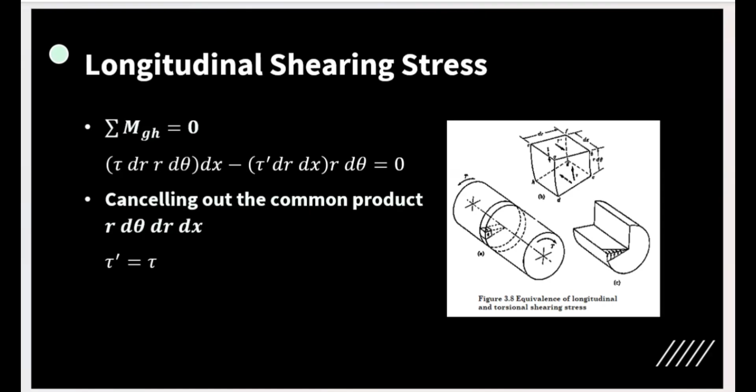The resultant longitudinal stress equals Q sub 1 delta L. Considering longitudinal equilibrium, Q sub 1 is equal to Q sub 2 since they share the same shear flow.

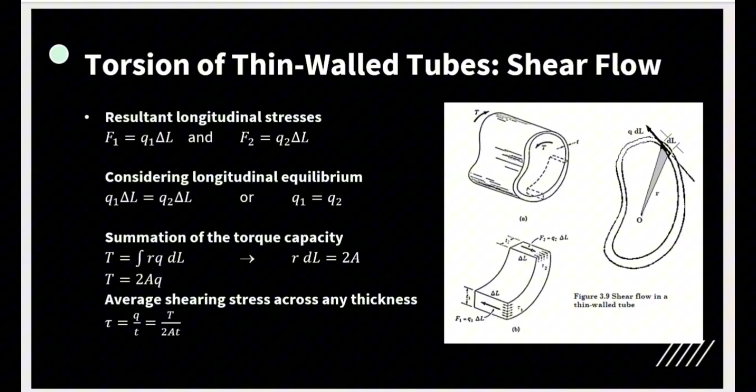Just like I said, it's similar to what we discussed before. But for us to really understand or grasp the concept, let's answer this example: a torque of 600 Newton meter is applied to the rectangular section shown in the figure.

So we have a rectangular section shown, where 80 and 30 mm are measured center to center. That's the consideration - measuring center to center. Meaning, the analysis is that I measured it at the middle to get the average, since there's still thickness, right? So it states here that we need to determine the wall thickness so as not to exceed the shear stress.

Of 80 megapascal. So remember our discussion on limiting stresses - it's the same concept again, similar to what we discussed before. We have a limiting shear stress of 80 megapascals, so it should not exceed that. And second, what is the shear stress on the short sides? Also, neglect stress concentration at the corners.

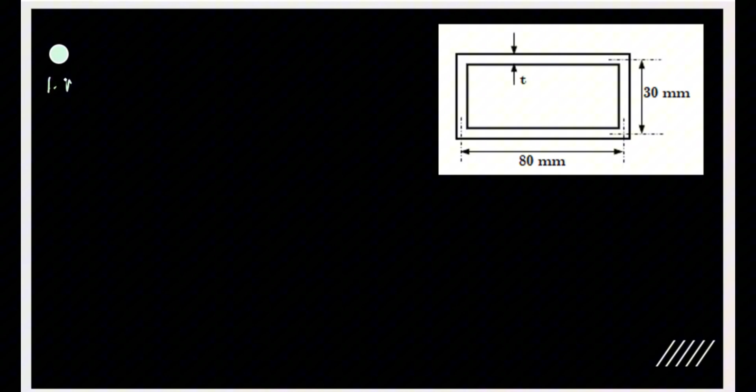Okay, so that's our illustration. For us to answer that, let's place it here on the upper right corner. So first, let's look at the illustration and answer the first question, since the first question asks us to compute for the wall thickness. Let's compute for the wall thickness.

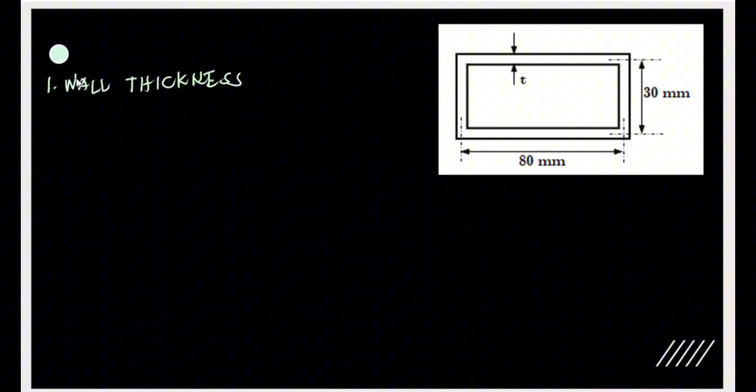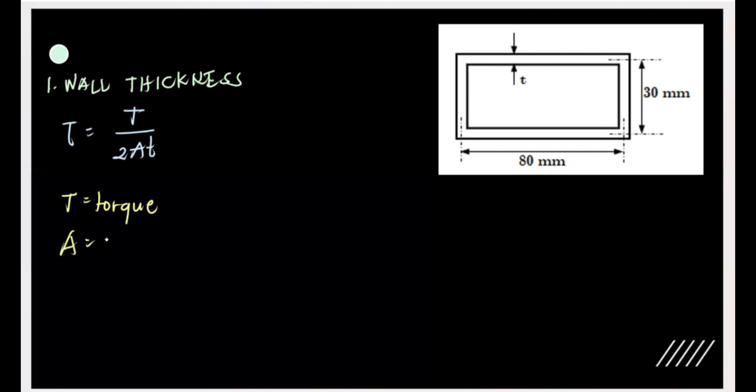For the wall thickness, we're going to use the formula, as I said earlier: tau is equal to T over 2A times T. Now what are the elements there? T is the torque value. A is the area of the section. And T is the wall thickness. So these are what we're going to use.

From our problem, our torque value is 600 Newton meter. Let's jot it down: 600 Newton meter. Our area of the section is 30 by 80, in millimeter squared.

And then wall thickness - this is our unknown. So it's up to us what unit we're going to use. Let's find it in millimeters, since our dimensions are already in millimeters. So if that's the case, we have to convert this torque value into Newton millimeter, that is 600 times 10 cube Newton millimeter.

Question: what is the shear stress? It's stated in the problem - we have a limiting shear stress of 80 megapascal.

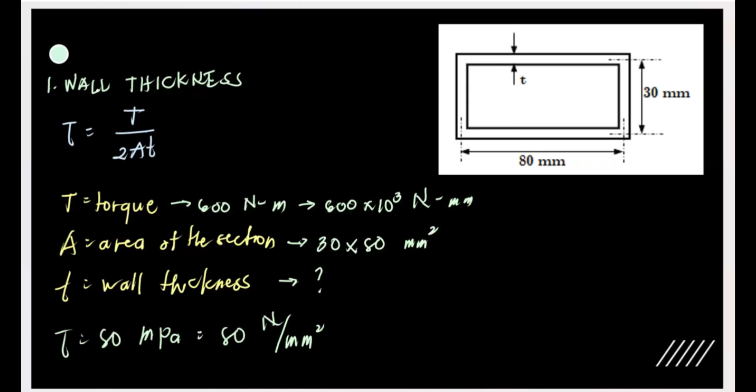Shear stress is 80 megapascal, or 80 Newton per square millimeter. Substituting from our equation: 600 times 10 cube over 2 times 30 by 80 by thickness is equal to 80. Simplifying, we get thickness equal to 1.5625 millimeters, or 1.56, to be exact. That's our thickness, the value we solved. It's quite thin, maybe because the stress is limited only to that value. Of course, the higher the shear stress, the higher the section or area covered by our stresses.

That's where our shear flows. So, 1.5625, that's our answer. Now, next question: what is the shear stress in the short sides?

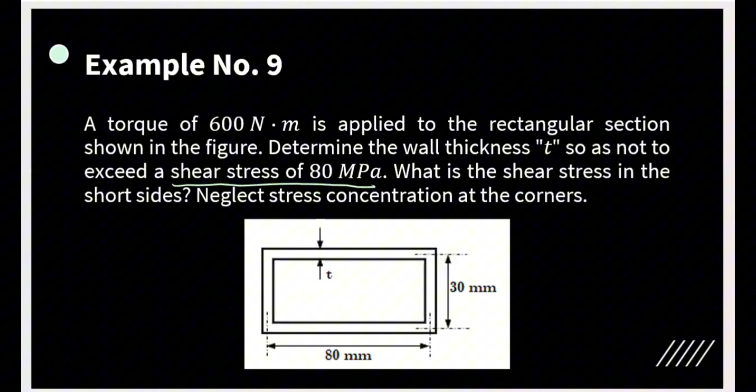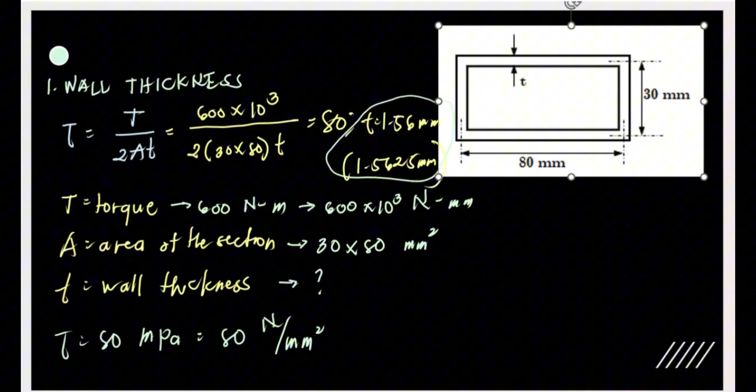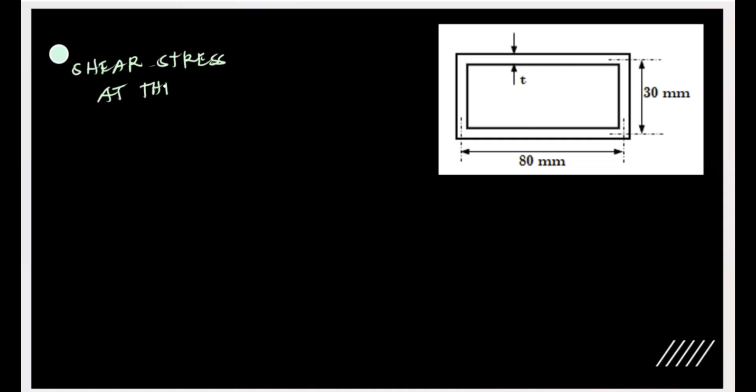Let's answer that. What is the shear stress in the short side? Let's copy this illustration. What is the shear stress at the short side? That is our next question: shear stress at the short side.

We know from our torque formula, torque is equal to 2 times area times Q. Q is the uniformly distributed force, or our shear force or shear flow, where our shear flows. That is in terms of a uniformly distributed load, our Q. To compute for the shear stress in the short side, we use the formula tau equals Q over T. That means we can compute Q. What is our torque?

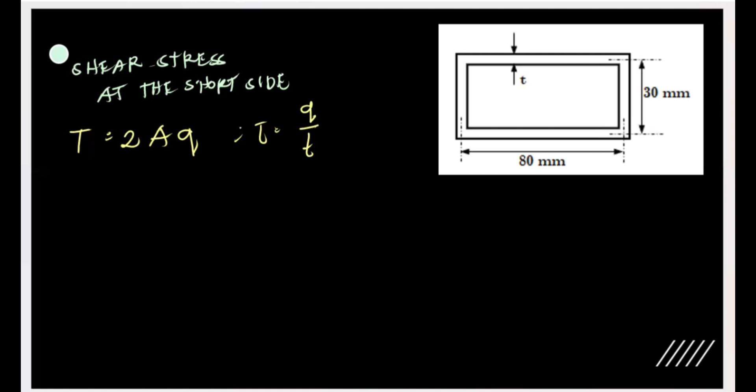Our torque is 600 times 10 cube Newton millimeter, equal to 2 times 30 times 80 millimeter squared, times Q. Therefore, our Q is 125 Newton per millimeter. So to compute for the shear stress, it's equal to Q over T, that is 125 Newton per millimeter over our thickness. Wall thickness is 1.5625 millimeter. Therefore, our shear stress is equal to 80 megapascal or 80 Newton per square millimeter.

That's the answer to our problem. Same thing if the area changes, it's easy because we know how to compute the area even if the shape changes, whether it becomes a trapezoid, circular, oblique, ellipse, or any shape, since we know that from our geometry classes.

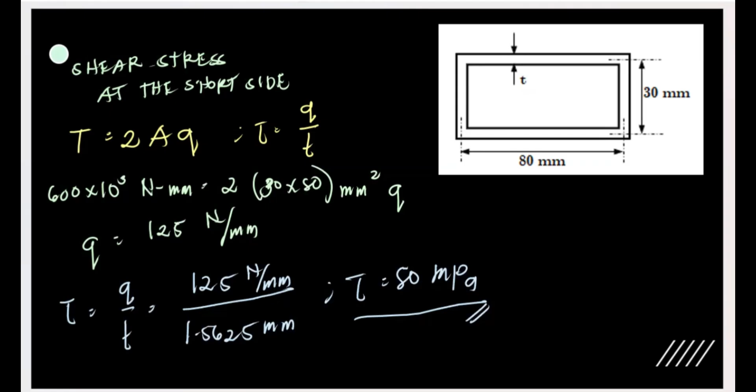So now let's move to another topic under torsion, which is helical spring. The concept of helical spring comes from calculus. If we go back to our mathematics, it's called oscillation, meaning back and forth, like a spring. In helical spring, we have these symbols that we'll use in this discussion.

Lowercase d is the wire diameter. Earlier in flange bolt couplings, this small d symbolized our diameter, but here in helical spring it's the wire diameter. M is the ratio of the mean diameter of the spring to the diameter of the wire, and N is the number of turns of the wire. Tau is the shearing stress on the wire, G is the modulus of rigidity, and J is the polar moment of inertia. That is the concept of helical spring.

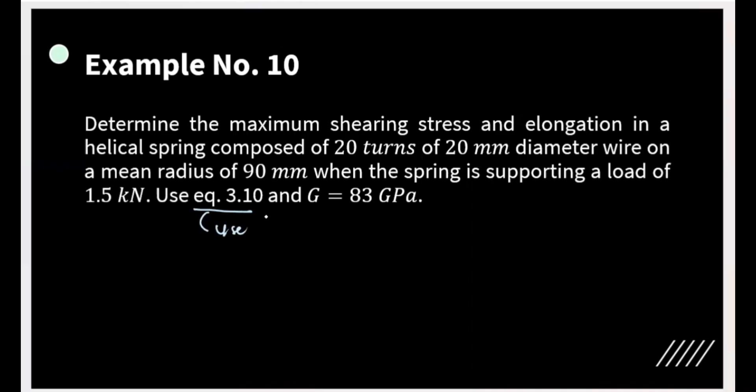So that's equation 3.10 - it pertains to using the heavy spring equation. The problem must be specific, so let's define it - what is 3.10? That's for the heavy spring equation. This is just the notation from the handout of this lecture. So, use the heavy spring equation - what was it again?

Let's go back. Tau is equal to 16 PR over pi d cube, multiplied by 4m minus 1 over 4m minus 4 plus 0.615 over m. So what is m again? M is, as noted at the very beginning, the ratio of the mean diameter of the spring to the diameter of the wire. That's our M.

Okay, let's go back to the problem. So that's our problem. M is the ratio of the mean diameter of the spring over the diameter of the wire. Now let's have our problem solved.

Let's answer it - what's the formula again? For this equation, tau is equal to 16 PR over pi d cube. Remember this because it's always the base, depending on what's used. In this case, heavy spring: 4m minus 1 over 4m minus 4 plus 0.615 over m.

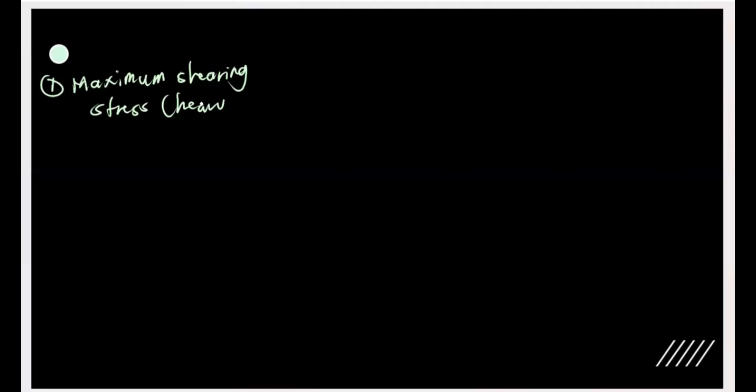Maximum shearing stress sa ating helical spring using the heavy spring equation. Kaya ang gagamitin natin ay ang heavy spring equation, kailangan nating banggitin ang consideration na ito.

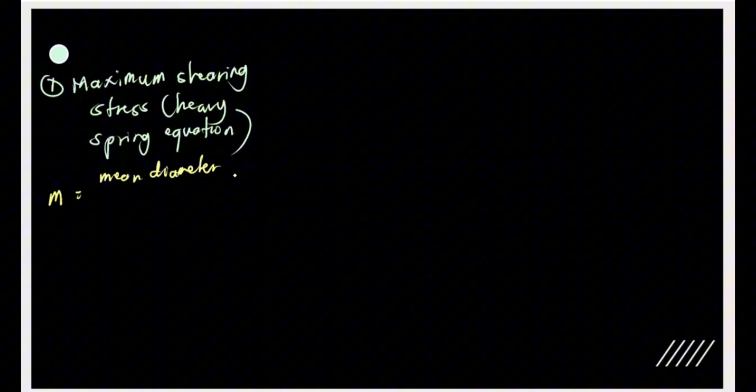Tau is equal to yung formula na may m. Computin muna natin yung m. Ano ba ang value ng m? M is the ratio of the mean diameter of the spring to the diameter of the wire. Lagay natin dito: mean diameter of the spring to the diameter of the wire.

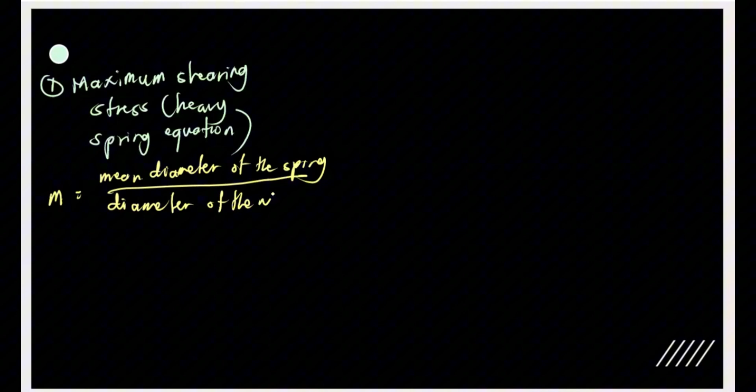Ano ba ang M? Ano ang binanggit sa problem? Meron tayong diameter ng spring, a mean radius of 90 mm, kaya diameter ay 2 times 90 mm kasi radius ang binanggit. Ano ang diameter of the wire? Diameter of the wire as per problem is 20 millimeter. Kaya ang ating M is equal to 9.

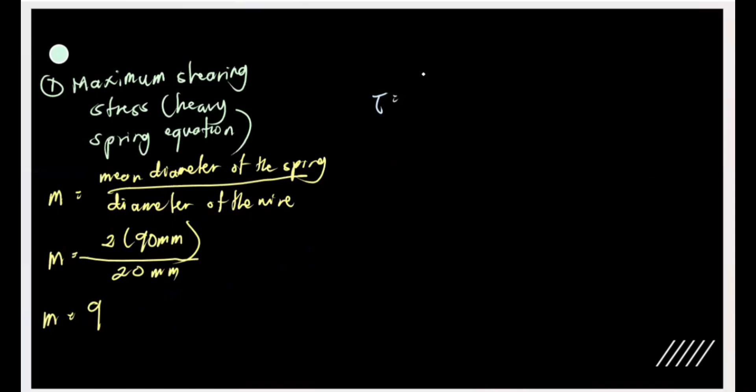Applying yung ating formula na tau is equal to 16 PR over pi d cube, multiplied by 4m minus 1 over 4m minus 4 plus 0.615 over m. Tau is equal to, ano yung P?

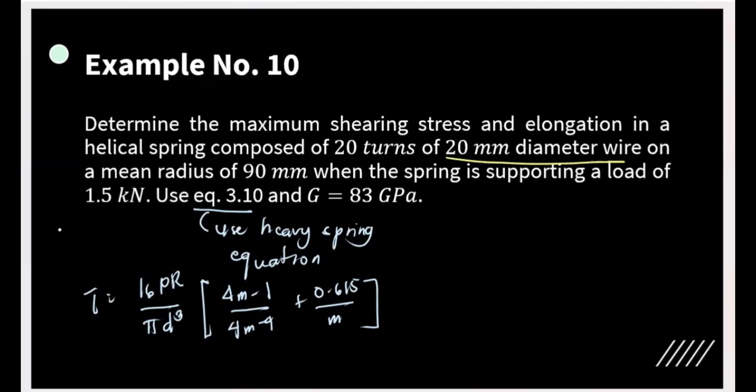P from this problem, makikita natin dito na meron tayong supporting load na 1.5 kilonewton. Isaysay natin: P natin is 1.5 kilonewton. Kaso we are going to deal with millimeters, so gawin na natin itong newton, pwede naman 1,500 newton.

Yung ating R is 90 millimeter, nakalagay spring mean radius. Diameter natin as stated is 20 millimeter diameter ng wire. Ano pa? Yung ating M na compute natin na 9.

Substitute natin lahat: this is 16 times 1,500 times 90 mm over pi times 20 cube, multiplied by 4 times 9 minus 1 over 4 times 9 minus 4 plus 0.615 over 9.

Therefore, our maximum shearing stress na naka-heavy spring is 99.874 megapascal or Newton per square millimeter. That is our first answer dun sa ating problem.

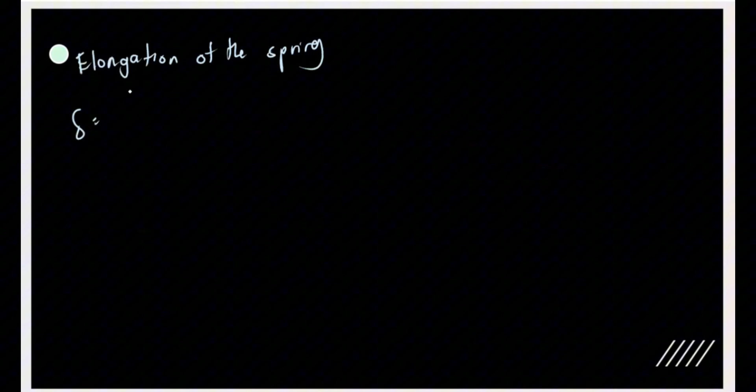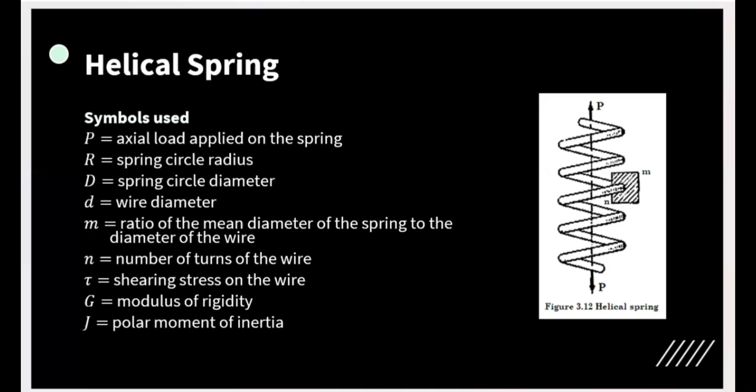Kung ganoon, i-solve na natin yung ating elongation. Deflection or elongation is 64 PR cube N over GD to the fourth. N is the number of turns of the wire. Basahin natin dito, may sinabi ba? The helical spring composed of 20 turns. Sulat na natin: N is equal to 20. Kompleto na, masasolve na natin yung ating equation.

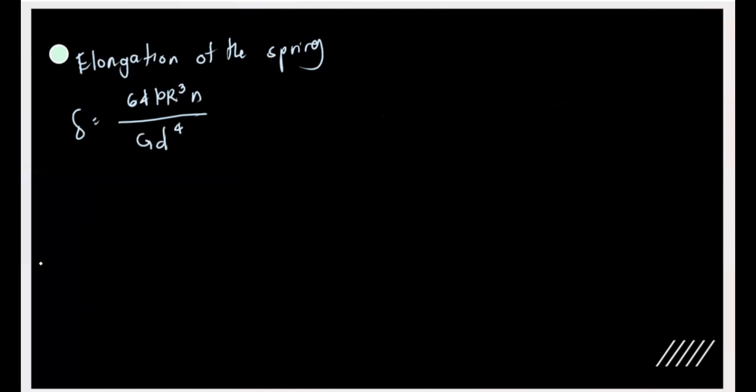Elongation is equal to 64, yung P natin is 1,500 Newton, times R na 90 mm cube, multiplied by 20 turns, over G.

Binigay ba sa atin yung modulus of rigidity? Eto, 83 gigapascal. Kung gumagamit tayo ng Newton at millimeter, kailangan gawin natin to in terms of Newton and millimeter, that is 83 times 10 cube megapascal or Newton per square millimeter, times diameter ng wire na 20 millimeters to the fourth. Kaya resulting unit natin dito, kung susundan ninyo yan, kasi may iwan na isang millimeter ay millimeter. So, the answer is 105.40 millimeter, that is the elongation of the wire.

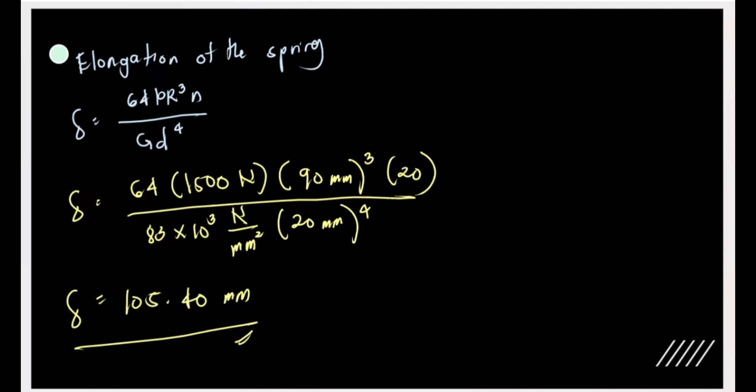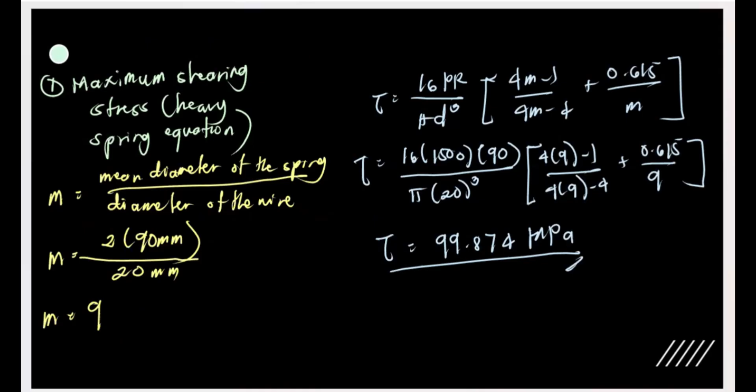That's it for our example problem number 10. Direct formula lang lahat, no? Kailangan maging specific, pwedeng light spring o heavy spring, kaya kailangan nating banggitin siya. Let's have our next problem.

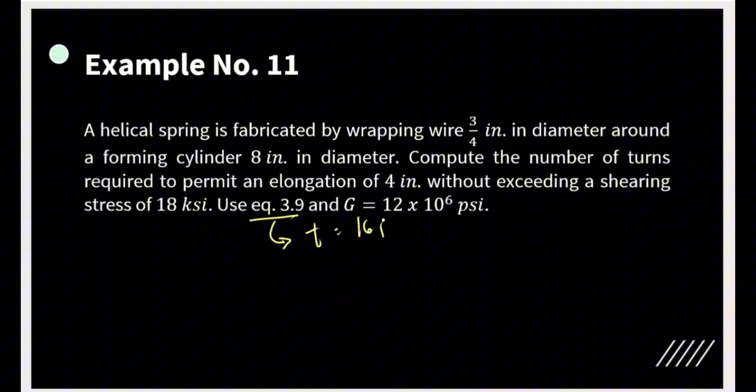So when it's mentioned to consider a light spring, that changes, if that's the light spring equation. But if not, and nothing else is mentioned, this is our general formula. This is the general formula for the maximum shearing stress.

This is the general formula for maximum shearing stress in a helical spring. So this is our basis.

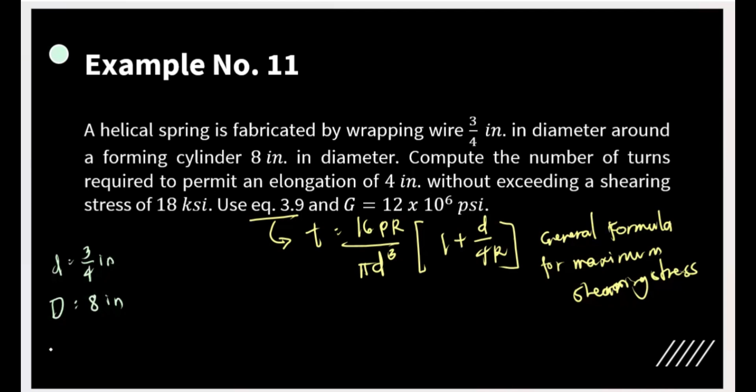So the elongation is 4 inches. Without exceeding the shearing stress - there's a given value. Shearing stress is 18 KSI.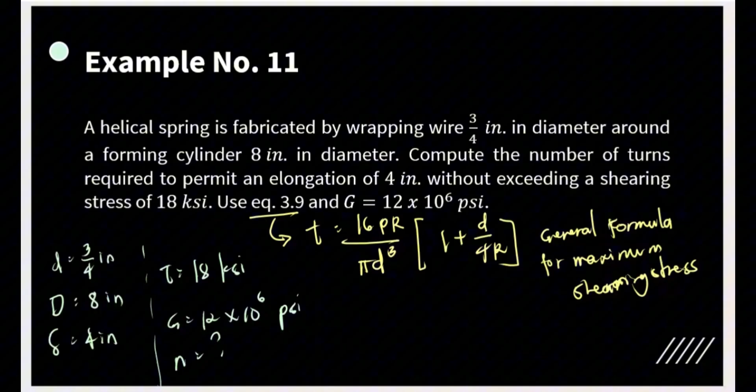Why? Because in this problem, we have two standard formulas to use. First, our general formula that I mentioned, tau equals 16 PR over pi d cubed multiplied by 1 plus d over 4r, and this elongation formula, which is 64 PR cubed n over GD to the fourth.

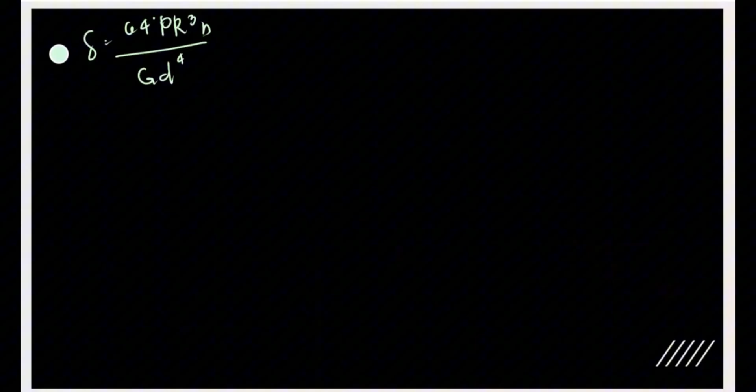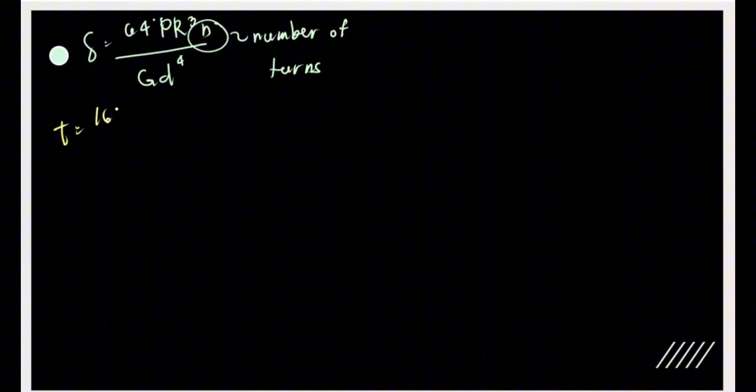The deformation or elongation is already given too. So only P is missing. Where will it come from? From here - from our formula tau equals 16 PR over pi d cubed multiplied by 1 plus d over 4r.

So substituting, that is 16 times P - what's our P again? Our P is unknown, so that's it. Times radius - the diameter was given, 8 inches, so radius is 4 inches. So 4 multiplied, over pi times d.

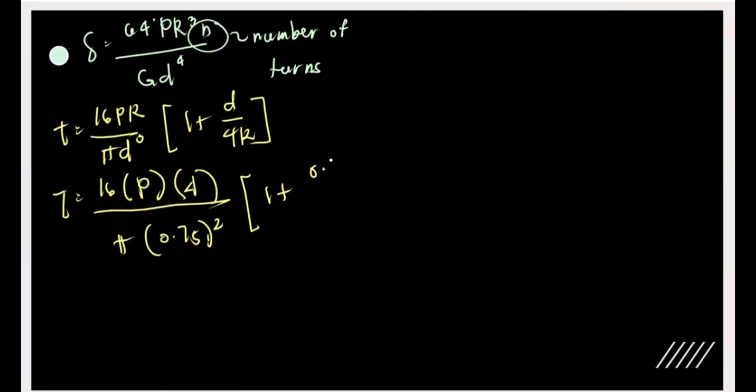What is our d? That is 3/4 or 0.75 inch cubed. So 0.75, cubed, multiplied by 1 plus 0.75 over 4 times 4.

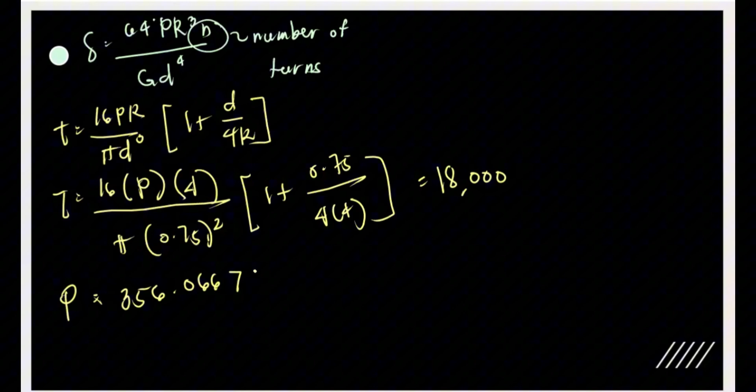So our shear stress is limited to 18 KSI, or 18,000 pounds per square inch since we're working in square inches. So P is equal to, in pounds, that is 356.0667 pounds. This is our P.

Now, to compute for the deflection or elongation, that is 64 PR cubed n over GD to the fourth. This is limited to 4 inches. So 4 inches is equal to 64 times P.

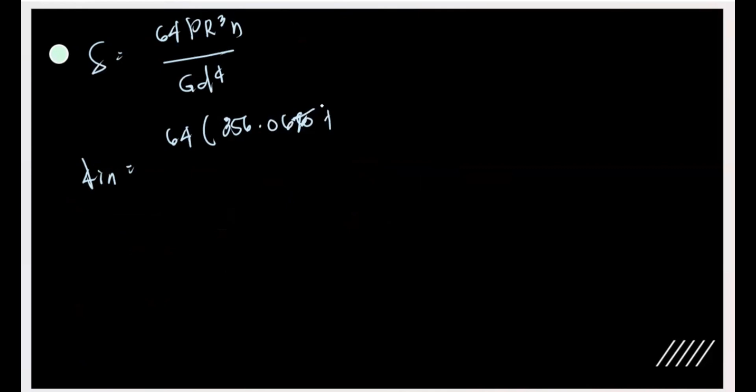Our P is 356.067 pounds multiplied by our R, which is 4 inches cubed, times the number of turns unknown, over G. Our G is 12 times 10 raised to 6 pounds per square inch, times 0.75 inch to the fourth.

So our number of turns is equal to 10.41 turns, since it's in the numerator. So that's it, 10.41 turns - that's our answer. It's specific, not a whole number, but that's fine since you can have 0.41 of a turn as it's a ratio. So that's it for our helical spring.

And that ends our discussion on torsion.